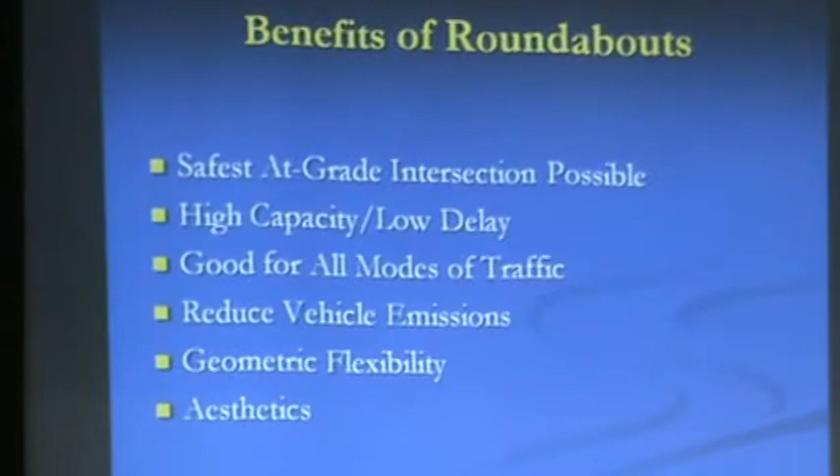We can work with geometry, with intersections that are very skewed, and the best thing that communities have found is that it helps to enhance the aesthetics of the area.

Roundabouts are not traffic circles, roundabouts are not rotaries. Rotaries are something we have seen, and we have one very close in town. It's a bigger circle, speeds are really high. When you get into the circle, you basically don't have any clear direction of where you are supposed to be, and there may be some confusion about whether you can change lanes inside the circle. Most of the time, there is not a clear indication for that.

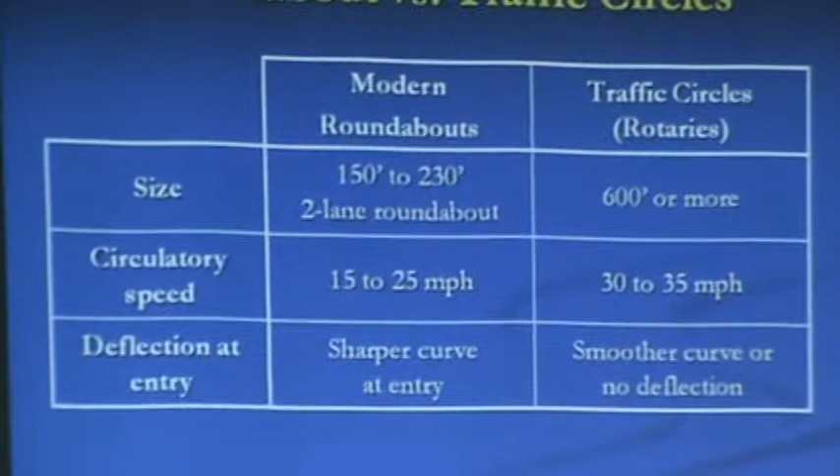If you remember the Sagamore Rotary in Massachusetts trying to get into the Cape, it was a nightmare, and it was huge. The only solution the Massachusetts Department of Transportation could provide was a flyover. The reason for that is because they had a lot more traffic than what a roundabout could manage. It's not because roundabouts wouldn't work per se, but the amount of traffic in that specific location was way beyond what a roundabout can manage.

A roundabout is usually between 150 to 230 feet in diameter when we're talking about two-lane. Some rotaries in existence are up to 600 feet in diameter - that's almost like a small NASCAR ring. Because the circle is a little smaller, vehicles are actually forced to drive very slowly, 15 to 25 miles an hour.

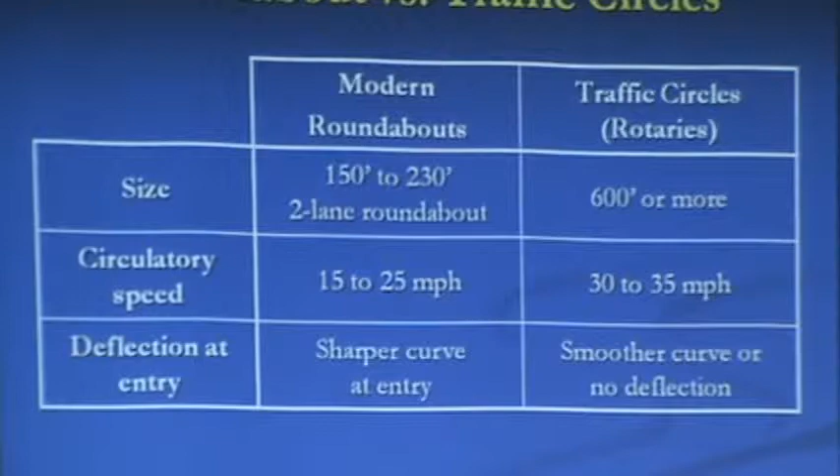When you have a big rotary, like those big circles in Massachusetts, you can reach very easily 40 miles an hour. If you are totally stopped at the entrance trying to merge into traffic in the circle, it's harder to merge with traffic going at 40 miles an hour than when traffic is going at 15 miles an hour. That's the beauty of it - you are actually capable of moving more traffic because everybody is moving slower.

There is a deflection in the entry. Rotaries just put you right there in the middle, and there is nothing in advance of the circle that forces you to slow down. Modern roundabouts actually have small curves just before you get to the circle, so you're slowing down before you get there. We'll see a few examples of that.

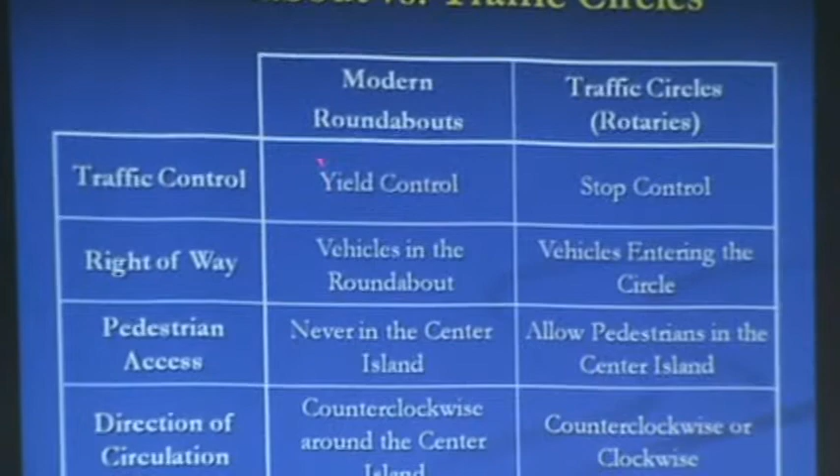The way they are controlled is yield control. There are some locations in other parts of the country where they have stop control. The right-of-way is for the vehicles already in the circle, similar to the rotaries we have in New England - whether we have a lot of drivers that do it or not, that's a different story.

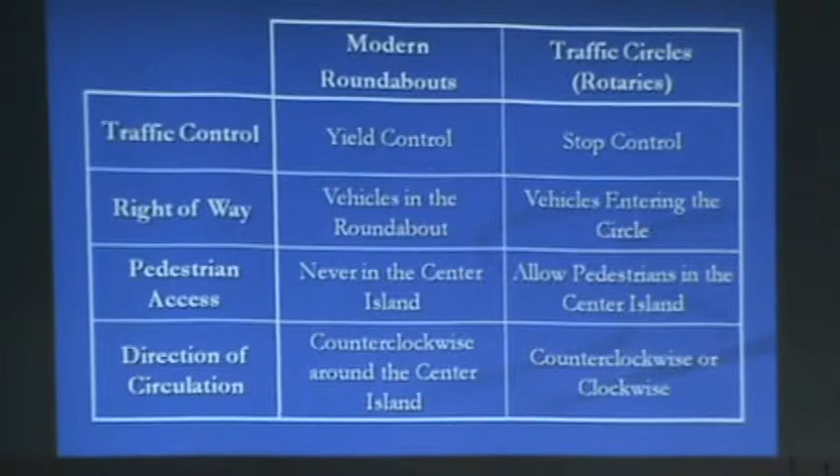Pedestrians are never allowed, or they are not encouraged to be in the island. If someone wants to water the plants in the center of the island, if they want to do it at their own risk, sure, go ahead, but there is nothing that we're going to design to have pedestrians gathered in the center. This is unlike Washington State, where they have neighborhood circles where someone can turn left before the circle.

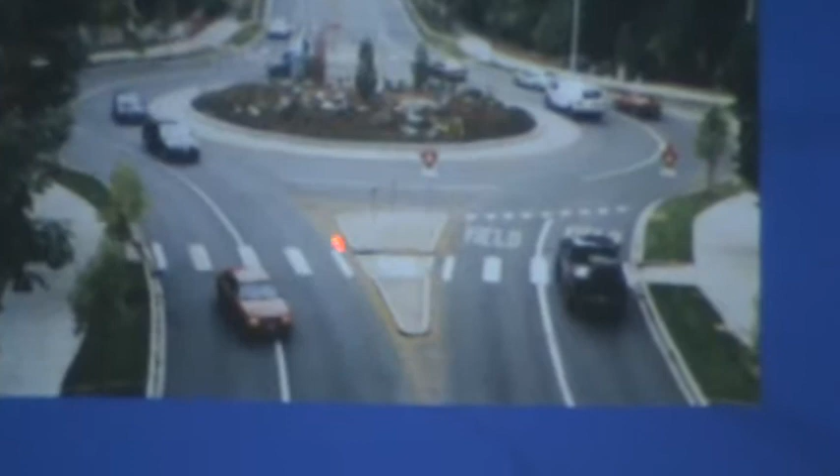In this case, we have a modern roundabout in Maryland. They have a beautiful landscape.

One of the beautiful things about roundabouts is that when you have to cross this road further down, you actually have to deal with 4 lanes of traffic. So you have to look to the left, make sure you have enough gap for those cars coming that direction, and at the same time look in the other direction and make sure you have a good gap in the other approach. The chances that you're going to have a good gap to run or walk across the road when dealing with 4 lanes of traffic is minimal.

You basically have to run, you have to be in very good shape. In the case of the roundabout, you're only dealing with 2 lanes of traffic, coming only from one direction. You don't have to deal with someone making a right turn or left turn who isn't looking at you, and the speeds of drivers already approaching the circle are a lot lower. You don't have 35 or 40 mile an hour traffic going in a straight shot while texting, on Facebook, or picking up a CD. When approaching a circle, there's so much lack of control, like a signal, that you don't have a green, a red, or a light per se. You have to pay attention to the road.

As a driver, you are forced to pay attention to the road. So if you have a pedestrian standing here trying to cross, you're probably going 25 miles an hour, and at that speed you're more likely to yield to the pedestrian trying to cross. As a pedestrian, you're only dealing with 2 lanes of traffic in the same direction. You cross, stay in the median, and wait for the other direction. There's always traffic coming at you from one direction, unlike any other intersection where you have to worry about right turns, left turns, and everyone going through.

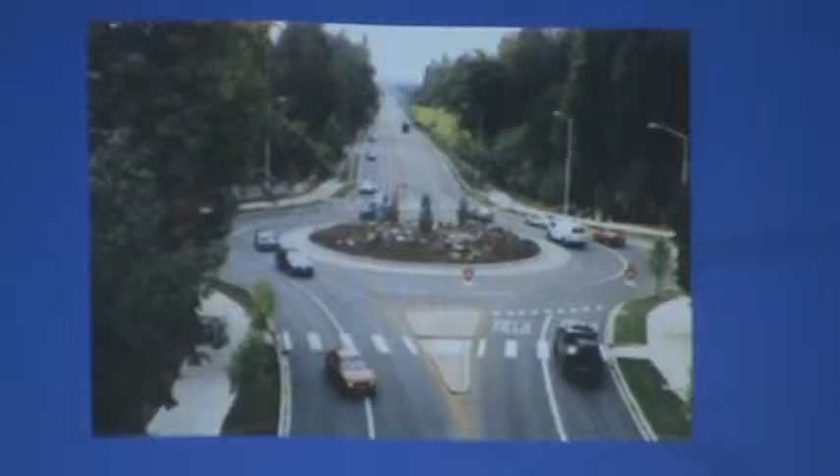Roundabouts are definitely not rotaries. This is a rotary that New York State Department of Transportation converted. You can see they were able to build the modern roundabout inside, with slip lanes for right turns, inside what the central island used to be. This is 660 feet in diameter, 2 to 3 times bigger than what we have in Newport Rotary, so you can get an idea of how big this is.

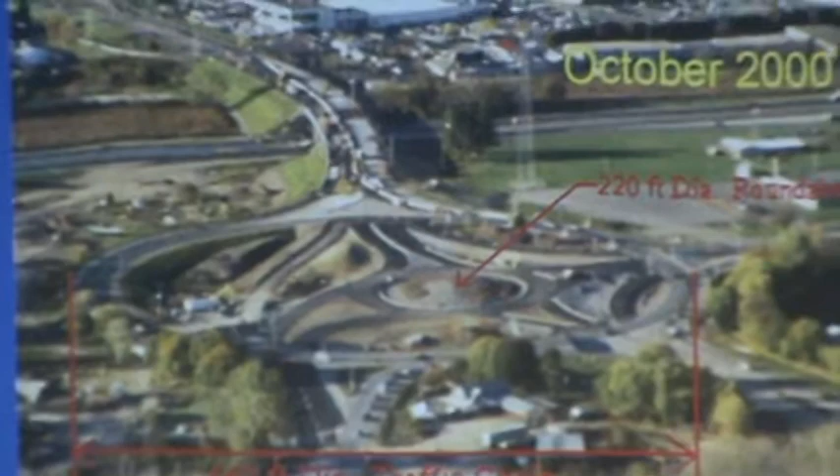At this rate, you could easily do 45 miles an hour. So they have a lot of congestion in this area. You can see all the queues, because of the construction, not just because of the operations of the rotary. They're replacing it with a smaller circle, and a lot of people were saying to the New York State Department of Transportation, 'You are crazy. How come you're going to manage more traffic with less pavement? You guys are making a terrible, terrible mistake. You are not going to do it.'

One of the things we have learned in the industry is that whenever a roundabout project is proposed, there is strong resistance from the communities. Something we try to do is outreach, to make sure everyone understands how a roundabout works. The opposition to installing a roundabout is really, really high, but once the roundabouts are installed, the opposition practically disappears. In some cases, towns have said, now that you're proposing a new signal for my town after you put in a roundabout, I don't want this signal.

I want that roundabout that you built there before. In this particular intersection, once they built it a lot smaller, it appeared there was a lot less traffic. All the people opposed to the roundabout were saying, you built this weird thing, it's not working, people are avoiding it, that's why we don't have traffic. They said everybody driving here doesn't understand how to drive, so they went away. At first glance, that's probably the best explanation for the lack of queues, the lack of traffic.

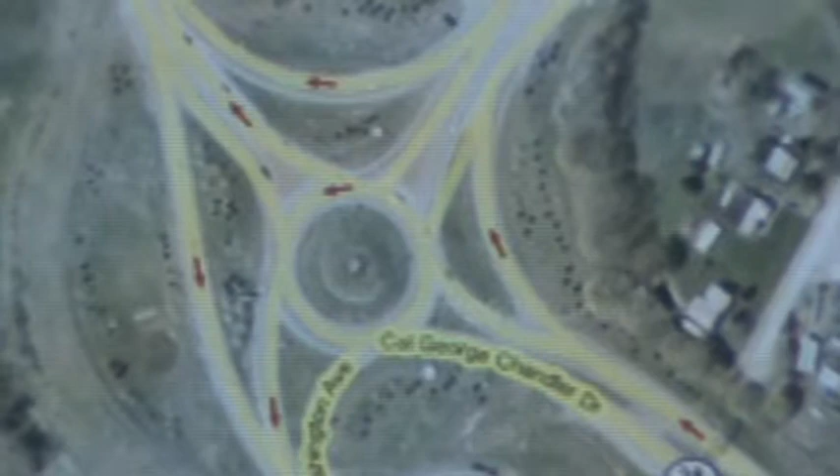When the New York State Department of Transportation did a study afterward, the volumes were comparable—not lower, not higher, very similar. It's just that a smaller circle can handle the traffic better.

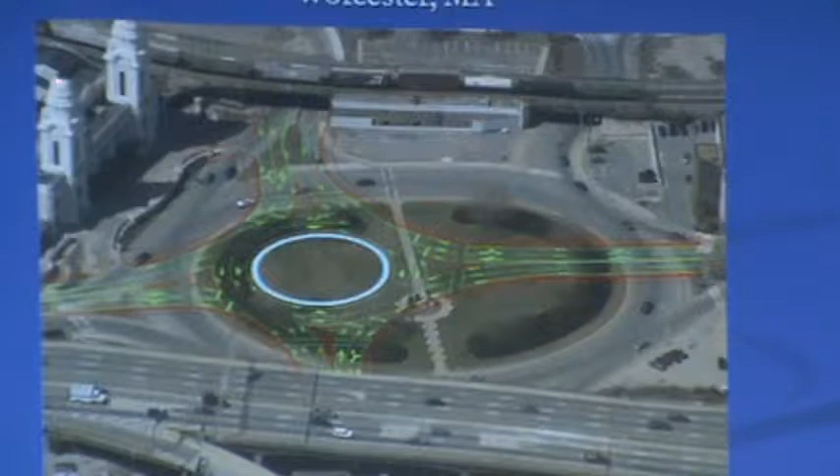This is another project, Massachusetts Department of Transportation working with the City of Worcester. They replaced this huge rotary with a modern roundabout, and it's available for anyone to see now if you take a ride to Worcester, right where the MBTA ends, Union Station. You can see it in operation, and they actually installed some flashy, fancy lights on the pavement—when anyone crossing pushes the button, lights tell drivers someone is on the road trying to cross.

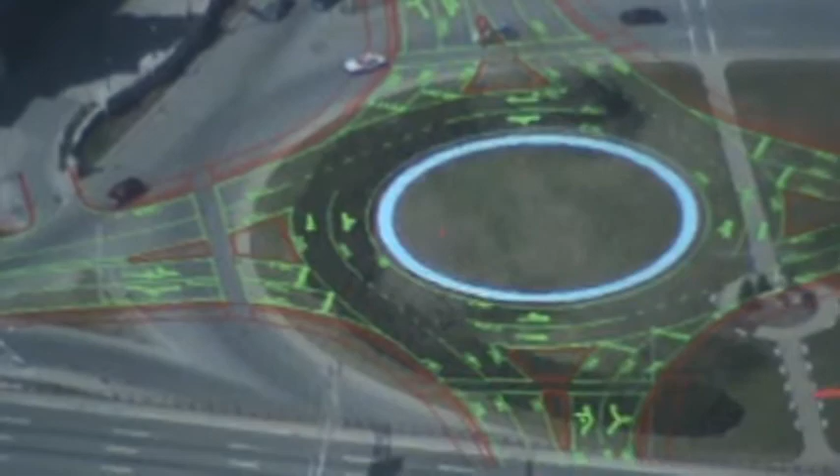That's something some municipalities and agencies are really willing to do—have some device to warn drivers there is a pedestrian crossing. Again, you can see the size of the circle is much smaller, allowing them to build a new intersection within the island that used to be there.

A roundabout is safer compared to a traditional intersection, and this is a single lane. At any traditional intersection—this could be your neighborhood street—you have up to 32 points of conflict. And if you add one more lane, you're going to add more points of conflict.

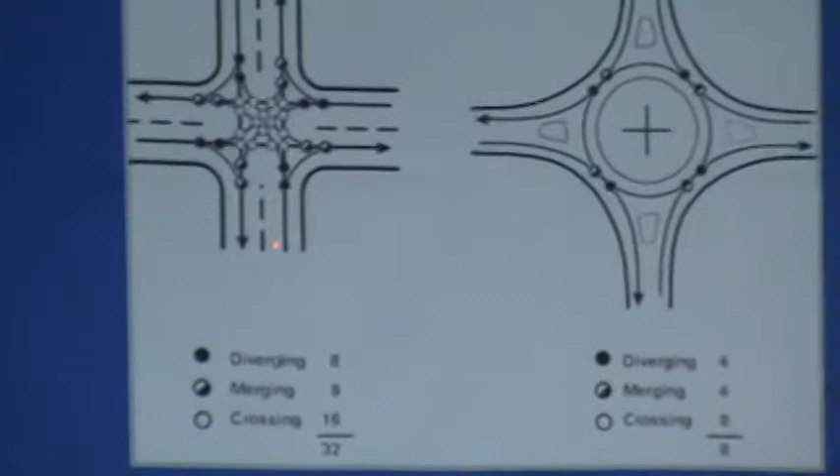At a traditional intersection, there's a risk of someone going in this direction, not stopping or distracted, hitting someone at a right angle. Or someone crossing in this direction while this person tries to take a left—there's a possibility of an angle collision. Most likely, when you read crash narratives, it's because the driver was trying to look for a gap in traffic, and sometimes they misjudge the gap and get a head-on collision. Or if they're lucky enough to make the movement, they also have to worry about pedestrians crossing.

In the case of a roundabout, you eliminate the possibility of an angle collision. There may be a higher possibility of a rear-end crash, because if I'm yielding to whoever is already in the circle, the person behind me may think I'm not going to yield, and I get rear-ended. But in any case, a rear-end crash is a lot less severe than an angle or head-on collision, and the speeds at which these events occur are very different.

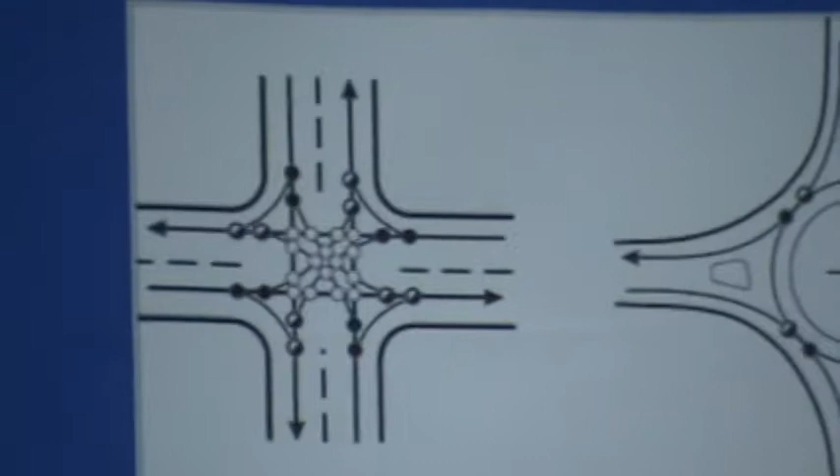In a roundabout you may be talking about a 15 to 25 mile an hour crash, compared to a head-on collision at 40 miles an hour when someone is stepping on the gas—which isn't always the case, but there's no chance, or a very small possibility, of a 45 mile an hour collision in a roundabout.

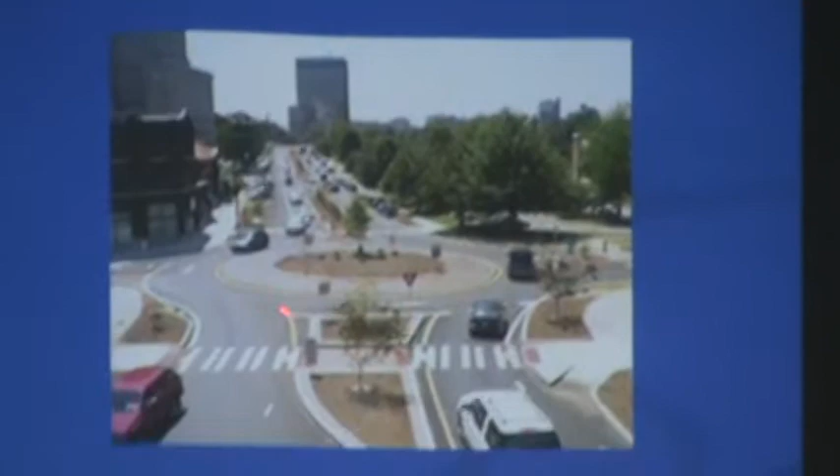Roundabouts are good for many environments. In an urban area, you might have 4 lanes in one direction, 3 in another—7 lanes of pavement—at a signalized intersection. They replaced it with a roundabout in the middle of an urban area with a lot of pedestrians, and because roundabouts are more efficient, they were able to manage the same amount of traffic with a single lane approach.

Instead of having all that pavement, they were able to put in trees and bushes, something more pleasing to the eye. It also helps with absorbing water—instead of all that runoff, you have some area to catch it.

A 2001 study by the Insurance Institute for Highway Safety looked at the people who pay the bill whenever you get a crash.

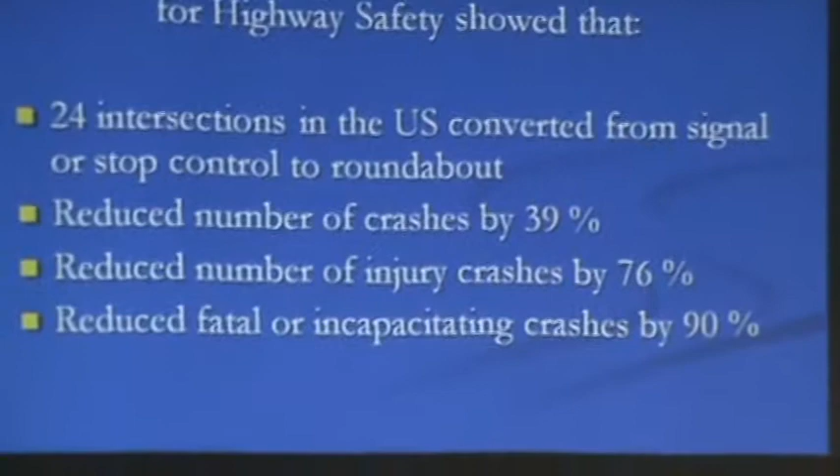Roundabouts are actually something that were pushed into the industry's throat, if we can say it like that. Federal Highway was not very receptive to that. Most of these intersections, many of the first roundabouts that were built in the U.S., were actually driven by the community. No Department of Transportation, no State Department of Transportation was really in favor of them at the beginning.

When we come with a show of roundabouts to communities, there is always someone approaching us saying, why didn't you just build a roundabout if there's an intersection you finished reconstructing about 2 years ago? Because we were not ready. There are many intersections that we're now kicking ourselves over, saying, why didn't we build a roundabout?

This would be a lot better operations, but we were not ready. This is something we had to learn, something we had to feel comfortable with. We wouldn't be here presenting you an option to have a roundabout in a location if we weren't comfortable with them. We're not experimenting with Middletown. We're definitely sure roundabouts can work. We're like a surfer, riding the tide that other states and communities already experienced. We're learning from their mistakes. If they had problems with signage and that kind of stuff, we're benefiting from their experience.

Roundabouts actually reduce the total number of crashes, single-lane roundabouts up to 40% total crashes. Injury crashes, anything that sends you to a hospital or doctor, 80%. Any fatal or incapacitating crash, something with a long-term impact on your health, up to 90%.

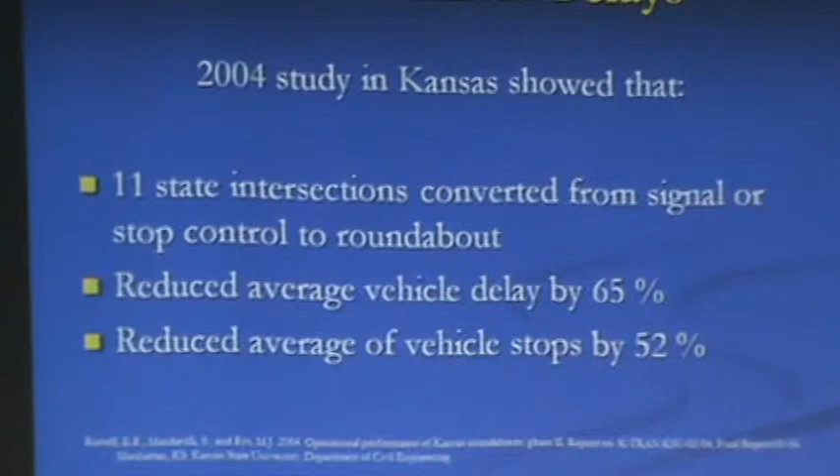More statistics: vehicle delays. A lot less people have to stop. Yes, if you go through and get a green at a signal, you basically have no delay. In a roundabout, you're always going to have some delay. You have to slow down, turn right, go around the circle, and take your exit. Everybody has a certain delay. But on average, if you add everybody, say 10,000 drivers using that circle, the average delay in that intersection compared to a signal or stop-control intersection is going to be a lot less.

When you have a green light you have no delay, but if you're stuck on a side street waiting 15, 20, 35, 45 seconds for a green light, those 45 seconds averaged with everyone else is how we estimate the delay.

We don't have as much pollution emitted to the environment, it's a lot less. Roughly, we cut it by a third. We can save a lot of fuel if we install more roundabouts.

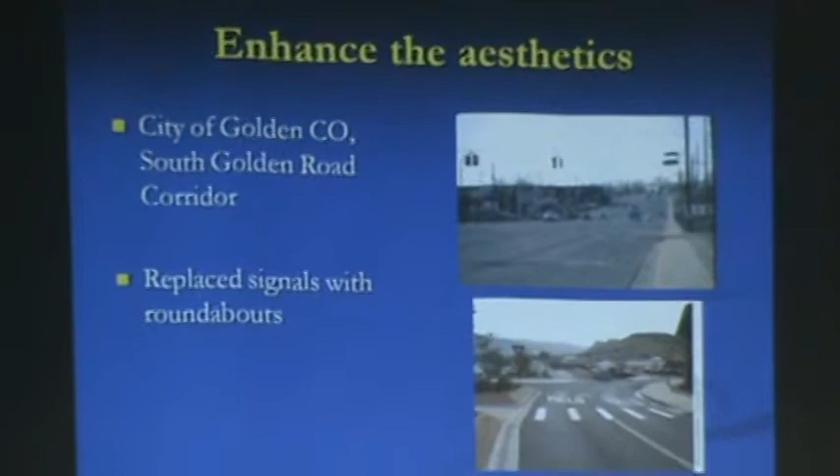The enhanced aesthetics also help the economy, if you want to say that. There's a study published by the city of Golden, Colorado. Go Google 'City of Golden, Colorado, roundabouts,' and I have a copy of this study if anybody wants to see it. They installed several roundabouts in this commercial corridor with a median.

So they told Burger King, IHOP, Walmart, sorry, you're not going to have a driveway where people can turn left in or left out. I'm sure they were very happy — I'm being sarcastic. They were very upset. There was no way, because a guy driving who wants to get a burger and a soda has to go around the circle and come back. He's never going to do it. They were very, very upset.

After several years of this project being active, the economic growth in this area, the businesses in this corridor, is a lot higher than the rest of the city of Golden, Colorado. People are actually willing to drive there because it's more pleasant and safer to drive. You can go from point A to point B a lot faster without necessarily going faster per se. You don't have to drive 40 miles an hour — you actually drive a lot slower, but you don't have to wait at every single intersection.

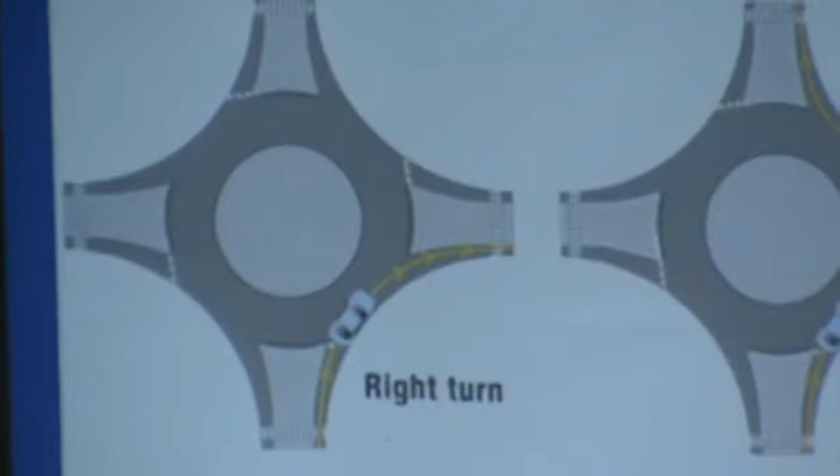I saw a beautiful article in the local paper about the difference in how to choose your lanes when you're driving a roundabout compared to a rotary. This isn't so new. Similar to what I was saying at the beginning, if you want to turn left in a roundabout, you locate yourself in the left lane, or if you want to turn right, you turn yourself into the right lane.

If this is new, we have to go back to driving school, because last time I checked, at any intersection, if you want to turn right you have to be in the right lane, and if you want to turn left you have to be in the left lane. If you want to go through, check the pavement markings and signage, because it's not the same for every roundabout, but you'll be able to go through the circle without changing lanes and reach your destination.

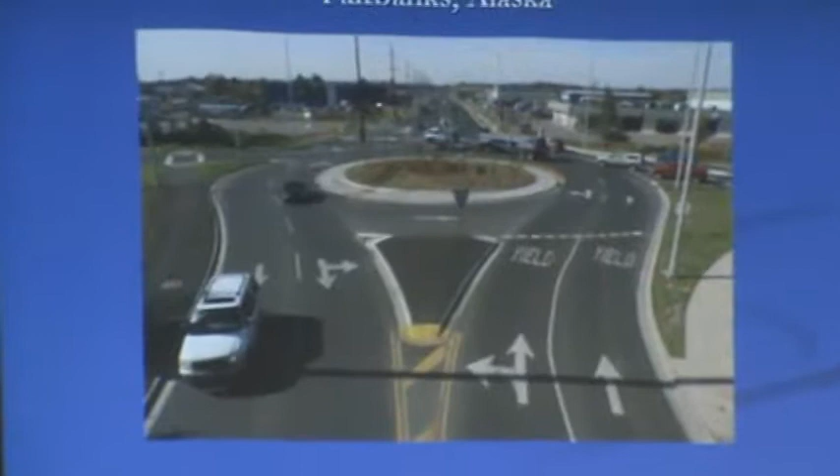Roundabouts are all over the place. They are not just for Rhode Island, not just for Middletown, not just for East Providence. We have heard all that before. Well, the industry has installed roundabouts in places with a little bit of snow like Alaska, with tourists like Colorado and Florida, and with a lot of pedestrians. In all these cases, the roundabouts have been successful.

Outside of an interstate, on a freeway, you most likely have WB-67 big trucks that deliver to the local stores.

This is another intersection closer to home, New Hampshire Main Street at Daniel Webster Highway. The first time I drove through this intersection, probably 13 years ago, I was very confused, but I never got into an accident. I didn't know that this area wasn't supposed to be driven on by my car, and I felt it. The next time I drove through, I didn't go on top of that area.

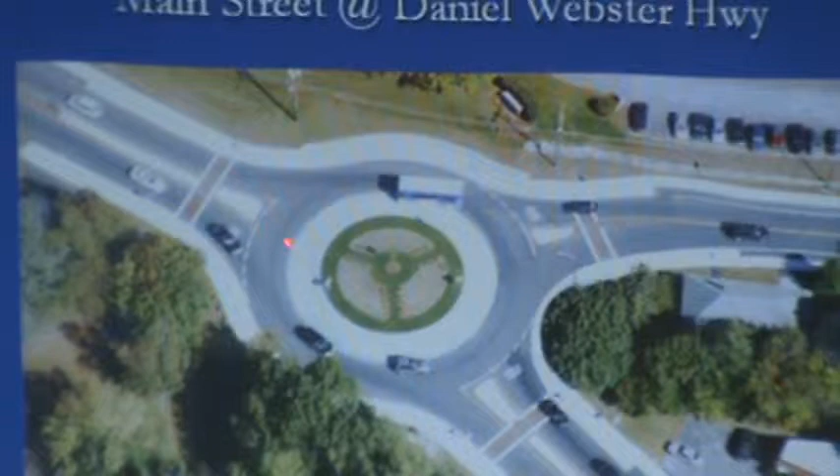My car didn't get damaged, but it's uncomfortable enough that you know you're not supposed to be driving there. It's designed so that any tractor trailer, big bus, or big truck can actually use it as extra pavement, but it's not meant to be driven on by passenger vehicles.

In Worcester, Massachusetts, at Washington Square, the one I was describing before, they actually have lights embedded in the pavement that start flashing when someone pushes the button. I'm not sure how effective they are. Talking to the traffic engineer for the district in Massachusetts, he said pedestrians just walk by and don't care about pushing the button, and they haven't had many or any issues that he's aware of in terms of handling the amount of traffic or handling pedestrians.

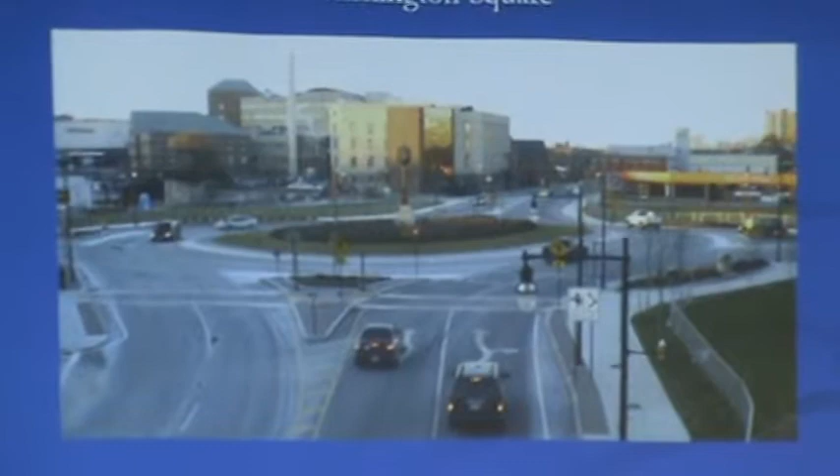The train runs through this part, and there's also another train track up here. On the other side of these train tracks, there's a signal very close by that gets used more than Ninth Street normally would be. As far as I'm aware, there aren't really concerns about traffic backing up from the signal toward the roundabout and creating a huge queue.

If you continue in this direction, you find the on-ramp to 290 that runs through the city of Worcester. So this is a roundabout in a very urban area with a lot of pedestrians who use the train, and with lots of different modes of transportation.

Roundabouts in Rhode Island—we already have four roundabouts in place. Two of them are one-lane, two of them are two-lane. The first one was installed in the late 90s in Centerdale, North Providence, again a project that wasn't driven by the Department of Transportation but something the community wanted to see. I'm not so sure how they convinced the department at the time to install something this experimental, but they went forward and installed it.

Twin River Road, right outside the gaming facility in Lincoln—we made the mistake as a department of never telling the public that there was going to be a roundabout, and oh boy, we heard about it.

We were the worst people you could even imagine in Lincoln. At that time, dealing with the police department during implementation, people were very confused about how to ride it, and they told us this was going to be a nightmare. As soon as we leave, the police said, there's going to be a head-on collision and we're going to have to come back to pick up the bodies. Well, we actually asked them to leave, and guess what? People were driving much better, because they had no distraction with the lights on, and all the cones and barrels were gone. So drivers were actually able to focus on all the elements of the road, pavement markings and signs, and were able to manage and handle that roundabout.

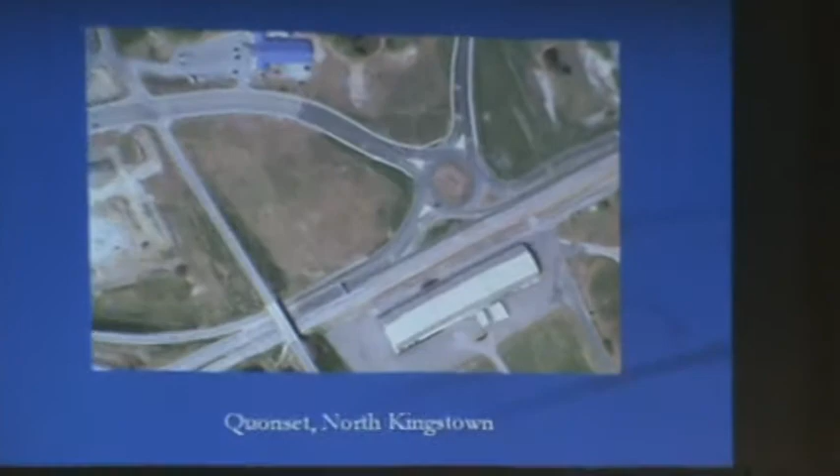This slide, I actually downloaded this image about a few months after the new roundabout was installed. Google was not catching up with us, and preparing for this presentation a couple of months ago, I found that they finally flew by and obtained some images, so I can show you now what a two-lane roundabout looks like. Unfortunately, we have the infrastructure, but we don't have the traffic yet. We expect that this roundabout will be heavily used.

One of the questions we heard, because this is not the first time we present this project, is what's going to happen when we have an emergency vehicle and if I am in the circle, what should I do? Well, I think we should do the same thing we do in any other intersection: just move away from the intersection and let the roundabout clear, so the ambulance, fire truck, or police car can actually go through the intersection.

This tractor trailer was actually stopped there for 5 minutes. I'm not so sure what happened to him - a flat tire or something, or maybe just taking pictures, visiting tourists. I'm not exactly sure. But this guy was stopped there for 5 minutes, and despite the fact that he was blocking 1.5 lanes, traffic was able to move around. If we had a tractor trailer stop right now on West Main Road, I'll tell you, it's not going to take more than 1 minute until we start seeing backups all the way to the main road.

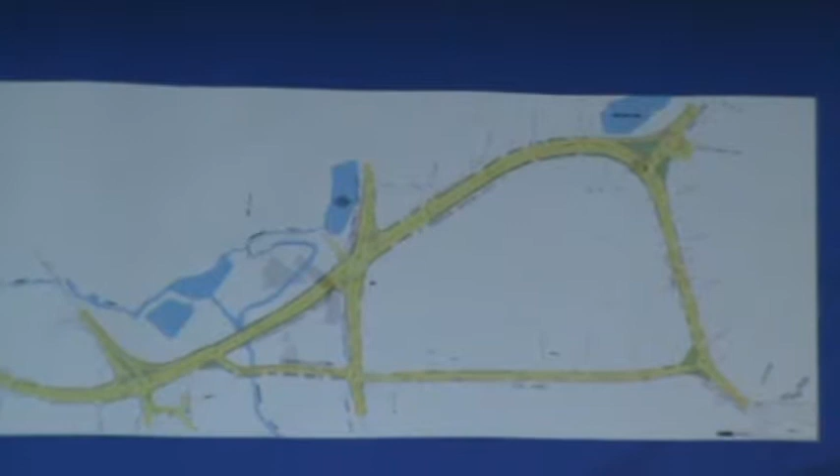This project actually proposed to make this section a two-way, and we're going to install, as I was saying, 5 signals. It was going to be a fantastic business opportunity for whoever wants to sell sodas on a very hot summer day, because you would have basically a parking lot in front of you, and everybody would be willing to have a cold soda.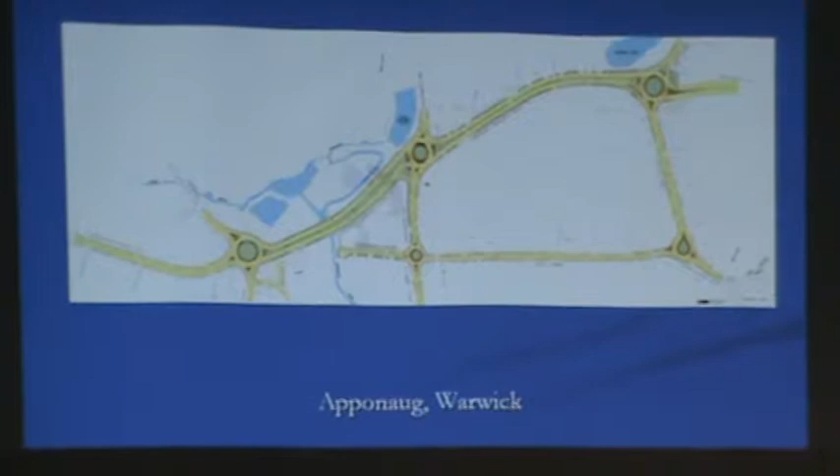We actually asked our consultant at some point, probably 3 or 4 years ago, what if we look into roundabouts? What if, instead of installing these signals that we know from day one are going to fail because there is so much traffic that it's not going to be able to handle - even the signals are not going to be able to handle the amount of pedestrian traffic we have.

Why don't we look into roundabouts? So we look into roundabouts and we are moving forward with the installation of multi-lane roundabouts, medians, and a couple of single-lane roundabouts in these two ends. Most of the traffic going from 95 further in this direction towards Oakland Beach on the eastern side of Warwick will have to drive to this corridor.

We had a public meeting, and at that time everybody was saying no more circles. We already took them out, why do you guys want to put them again? We presented the presentation, we explained what roundabouts can do for the people. I can tell you we did not convince 100% of the people, but whoever was totally against the roundabouts was at least willing to give them a chance.

And at this point, with support of the mayor of Warwick, we keep moving forward with the design of this 5 roundabout corridor.

So whether we like it or not, at some point, whenever you go to Warwick, in probably 10 years, you will have to deal with roundabouts. So we either learn now, or we will learn sometime later, because roundabouts are going to happen in Rhode Island no matter the funds, or no matter what every specific town would like to see, because there are other municipalities in Rhode Island that are willing to install roundabouts in their roadways.

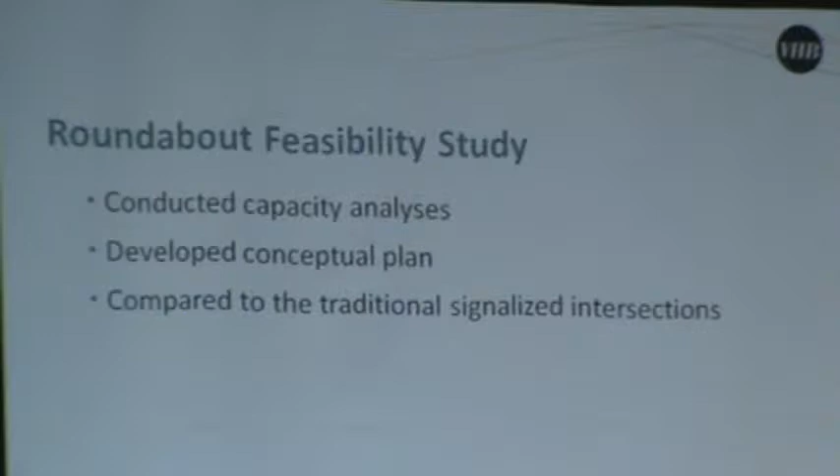These are the two options shown earlier. The signalized concept, similar to today, will have two traffic signals. The major difference is the left turn lane, which doesn't exist today between the intersections, whereas if a vehicle is waiting to take a left turn, it a lot of times today will block one of the through lanes, so you're down to one through lane at the intersection. The addition of a left turn lane will improve that situation.

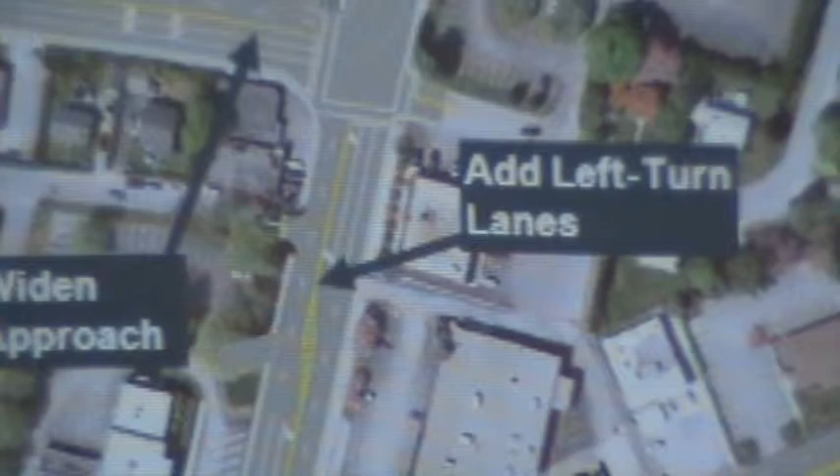On the right is the roundabout concept. We did a capacity analysis of these. The first two columns show the overall delay and the level of service of the existing traffic signals out there.

They operate at a certain level at the Coddington Highway. During the morning and evening peak it operates at level of service D, about 40 seconds of delay, average delay - that's the average delay to every vehicle going through the intersection. The East Main Road intersection currently operates at level of service C, with average delays from 23 to 33 seconds per vehicle.

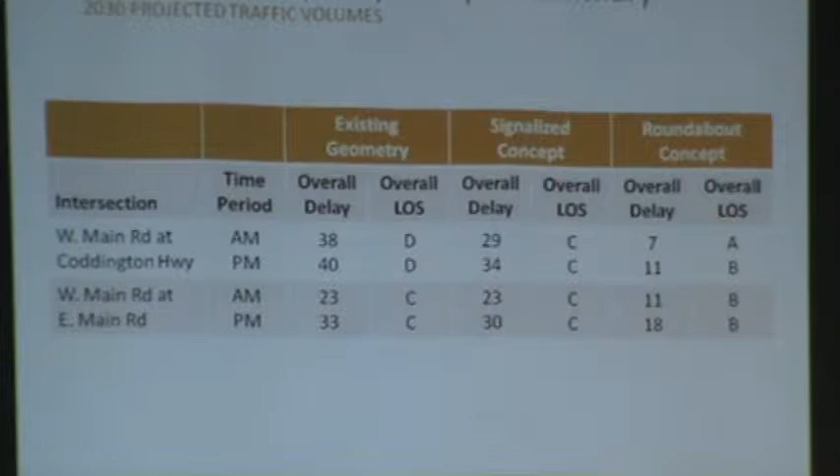As you can see, the signalized and the roundabout concept will improve the operation of the intersection and provide additional capacity. We end up with level of service C for the signalized option, level of service B with the exception of level of service A during the AM peak at Coddington Highway.

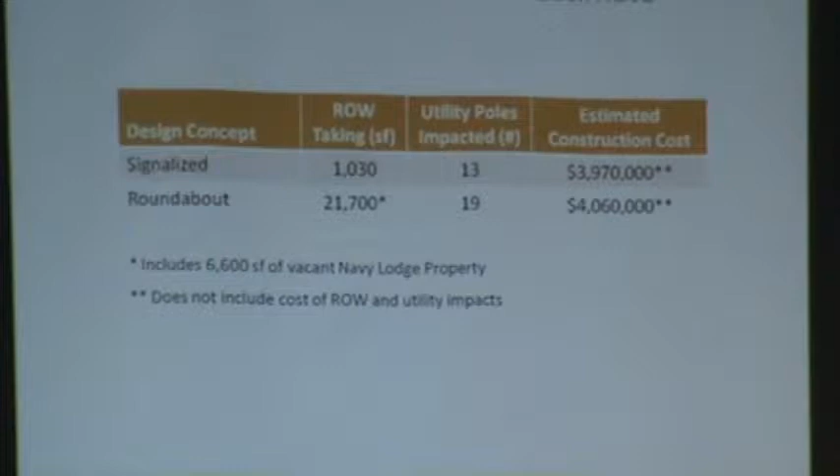The construction impacts and cost estimate.

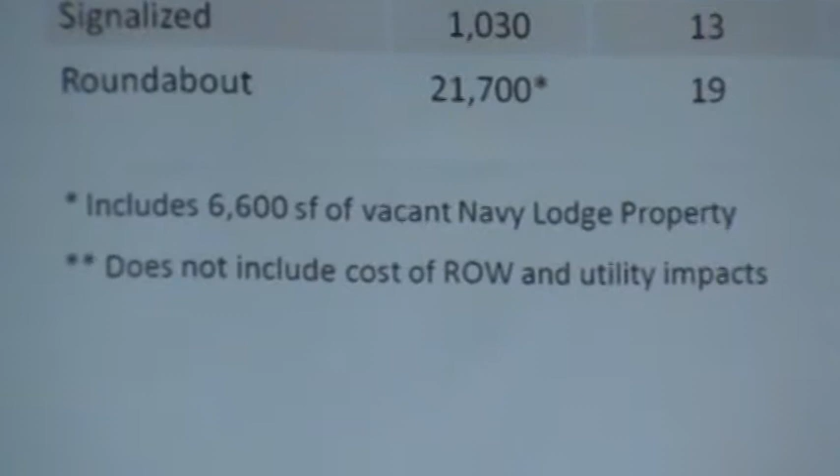The costs of these are comparable. The signalized option has a much less right-of-way impact, 1,000 square feet of right-of-way versus 21,000. This 21,000 also includes 6,000 square feet of the Navy Lodge property. It's important to note that these two cost estimates don't include right-of-way impacts, which are difficult to project. So the roundabout, with a lot more right-of-way impacts, will increase the cost estimate.

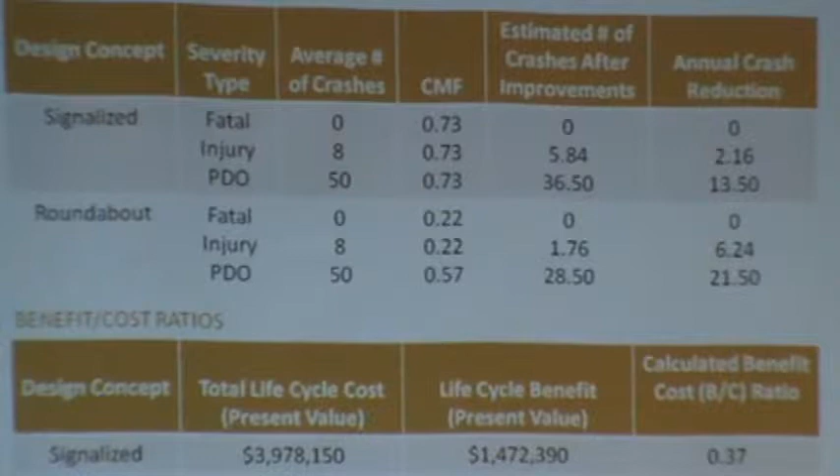We then go through a safety benefit and a benefit to cost ratio. As Francisco discussed earlier, there are crash factors and improvements that the roundabout will have, reducing the severity of accidents. This has been shown in other places where roundabouts have been implemented, and those crash factors feed into the benefits of both the signalized and roundabout options. Adding the left turn lanes at the signalized intersection will also have some benefits.

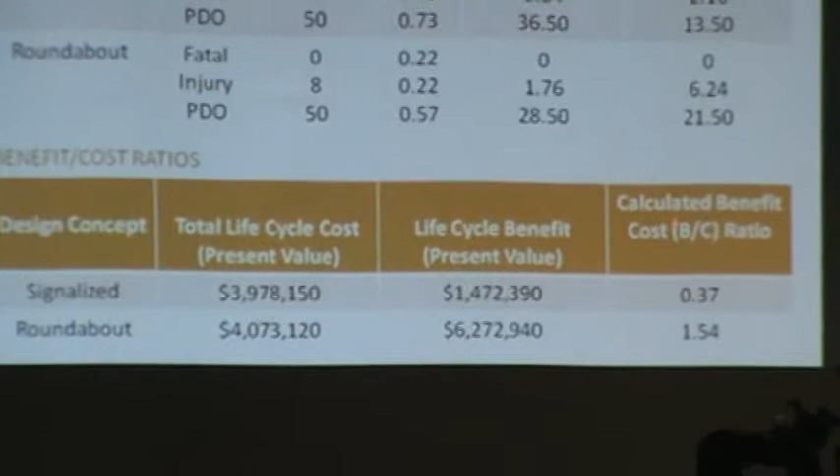So what we come up with, at the bottom here, is the signalized and roundabout options' benefit to cost ratio. Obviously, if your benefits exceed your costs, you end up with a number greater than 1, and you always try to shoot for a benefit to cost ratio greater than 1. The roundabout option gives you that, whereas the signalized option is still an improvement, but not as big of one.

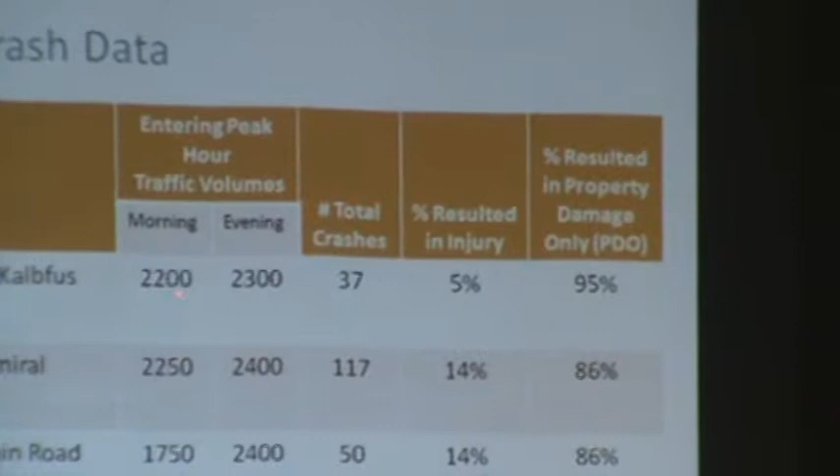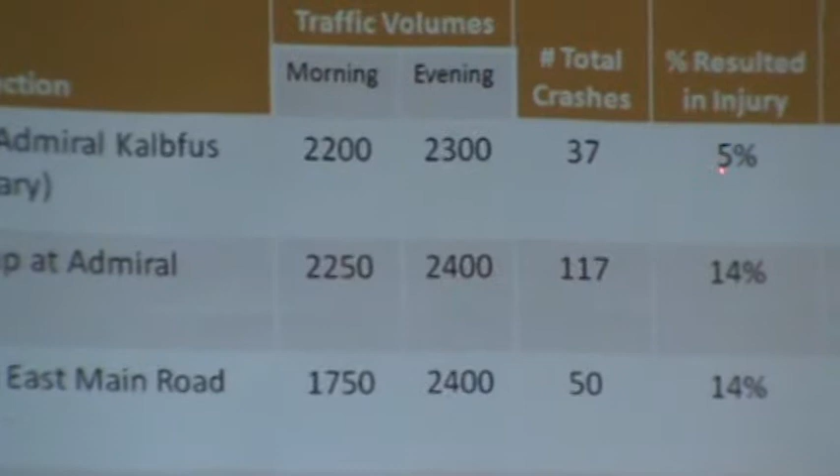This is an important slide to compare other intersections everybody's familiar with. The first is the Newport Rotary, with volumes a little over 2,000 vehicles per hour. The number of crashes under existing conditions is 37, with 95% being property damage only and 5% resulting in injuries. Compared to the Pell Bridge off-ramp at Admiral Kalbfus, with comparable volumes, you see 14% injury crashes. That's primarily due to all the conflict points Francisco was talking about earlier. West Main Road, East Main Road, Coddington are similar, around this 14% injury rate.

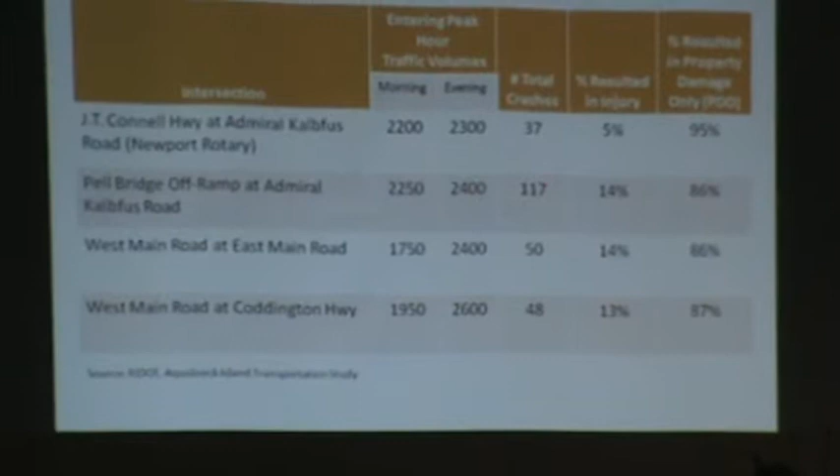So even if you look at total volumes, even though the rotary isn't a roundabout, and roundabouts are typically even safer than rotaries, you have a total crash count less than the existing two intersections.

We have some simulation models that we put together. I think we're going to show those just after. Maybe I'll show you the clips from the videos just to show you what you're going to be looking at.

This is West Main Road, Coddington is here, East Main Road is here. This is the signalized option, this is the roundabout option. In both of our simulations, what we first look at is existing conditions, and we try to calibrate that to accurately represent actual conditions on the roadway. Then we go and implement both of the two proposed alternatives.

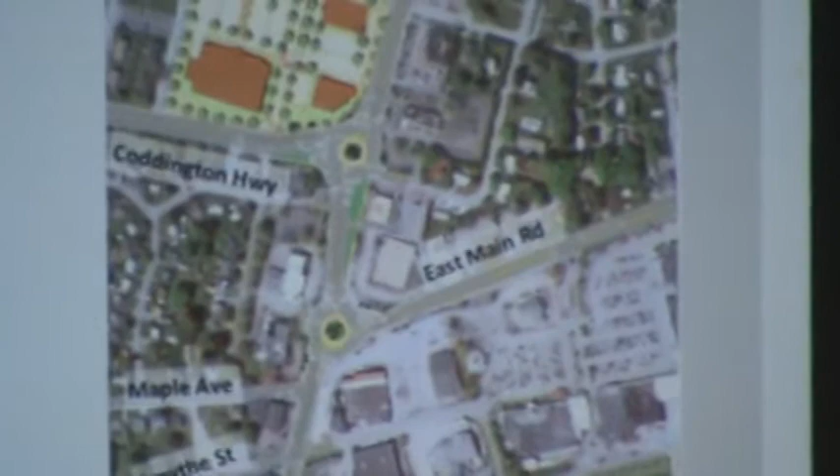What we include in these future simulation models and our analysis is the 2030 traffic volumes. They include expected growth in the area, and also the growth setting here that's under design and planning stages at this point. So we included all of that additional traffic that's going to be generated in the future, just to make sure we don't put either of these improvements in and have them become obsolete before we get them constructed.

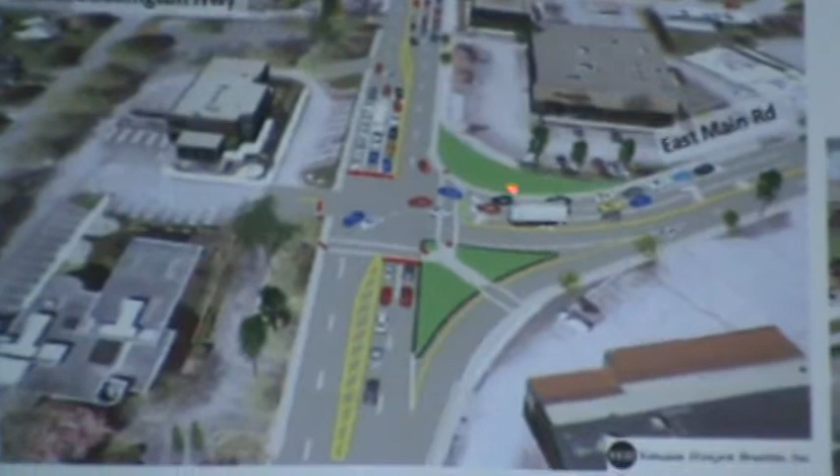These are some snapshots from the video you'll be seeing. This is the signalized option with modifications to these right turn movements. As you know from East Main, there's a channelized right turn movement which people sometimes don't yield or stop at the end of, if traffic is heading north on West Main. So this is going to bring them into the intersection and require those vehicles to stop.

Again, heading northbound from West Main Road onto East Main Road, this is such a generous and large radius that people fly around this corner. There are geometric modifications proposed that will reduce this radius and slow vehicles down from making such rapid movements.

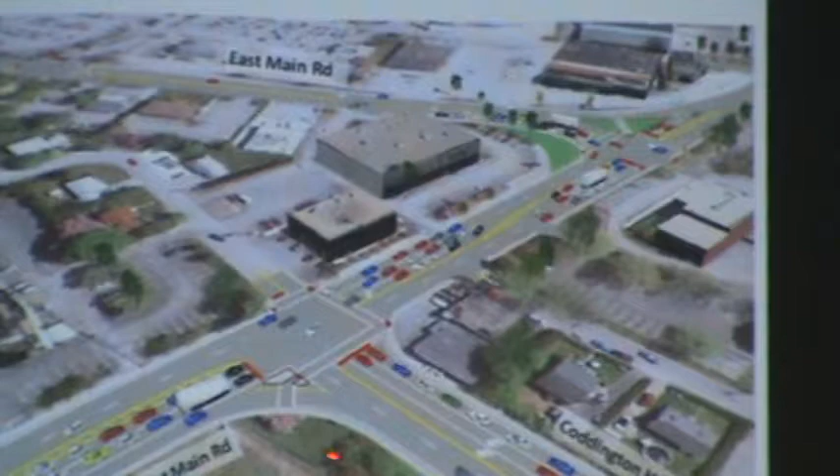This is kind of flipped around. Coddington comes in from the west side heading eastbound - this is the Coddington approach. What you'll see in the simulations is an aerial flyover of both study areas - this is Coddington, and this is West Main.

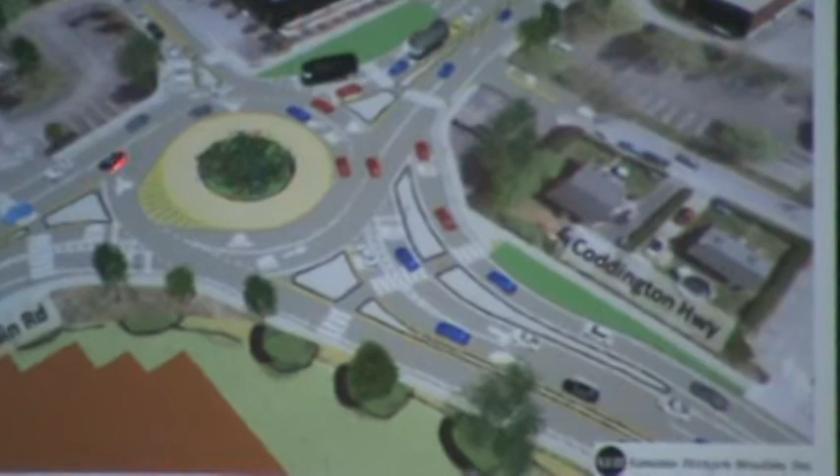Again, the same viewpoints - these are the two roundabouts, and this is Coddington with the roundabouts. If you look at the lane configurations, the Coddington approach proposes a left turn lane, a left-through lane, and a right turn bypass lane, which is like an exclusive right turn lane, so those people won't even be entering the roundabout. All the other approaches are two-lane approaches.

Let's go through and show the simulation.

We also keep in mind we didn't perform traffic counts of all the driveways along the corridor, but we did put in some volumes on each side street which correlate to the total volumes in the corridor.

It does represent that. What you see happening today, a lot of people are often complaining about the signals, getting stopped at multiple signals as they progress down the corridor. It's difficult, and the DOT's gone through several times trying to fine tune and get the platoons through as many signals as they can. But what happens is you have a lot of side friction. You have people coming in and out of driveways, people stopping in the left lane to take a left turn, which people have to swerve and go around. So that's a difficult thing for them to do.

We're going to just summarize the differences between the roundabouts, and then we're going to switch computers real quick, and then we'll show you the simulation. Let's go back here.

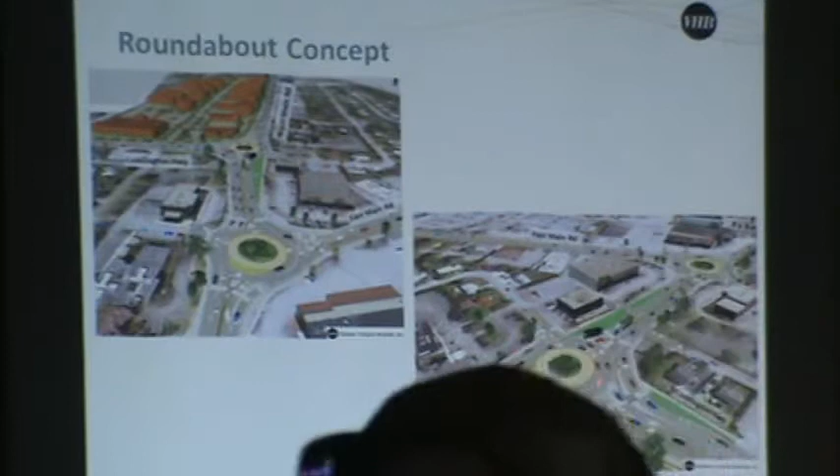Again, as Francisco was talking about, if you're coming down Coddington and the roundabout concept were to be implemented, and you wanted to take a left turn, today there's no left turn movement, so you can make a left turn from the roundabout in either of these two lanes, and this will direct you around and through the intersection.

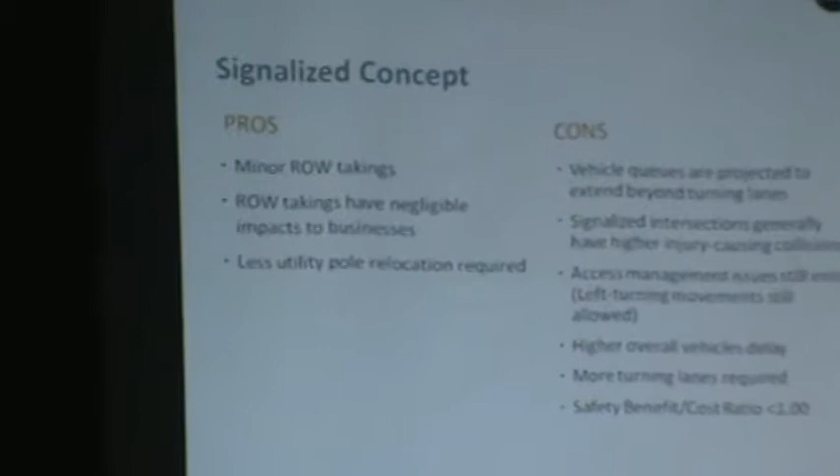The signalized concept, we prepared the pros and cons of each of these two alternatives. Again, the DOT and we also agree that either of these two alternatives is going to be an improvement on what's there today.

The pros for the signalized are that there's less right-of-way taking. The right-of-way takings are negligible compared to the operation of the businesses. There's less utility pole relocations. The cons: vehicle queues projected to extend beyond the turn bays.

Ideally, back in this drawing, we have a back-to-back left turn lane here. Ideally, we have a five-lane section in here with a left turn lane in Coddington filling up half of that area, and then left turn into Coddington filling up half the area, and the left turn onto East Main filling up half of that area. The projected queues are going to extend past those storage lanes and will occasionally block one of the through lanes. So ideally, it would be nice to have a 6-lane section here where you had the left turn lane full length to accommodate those cars, and a left turn bay in the other direction.

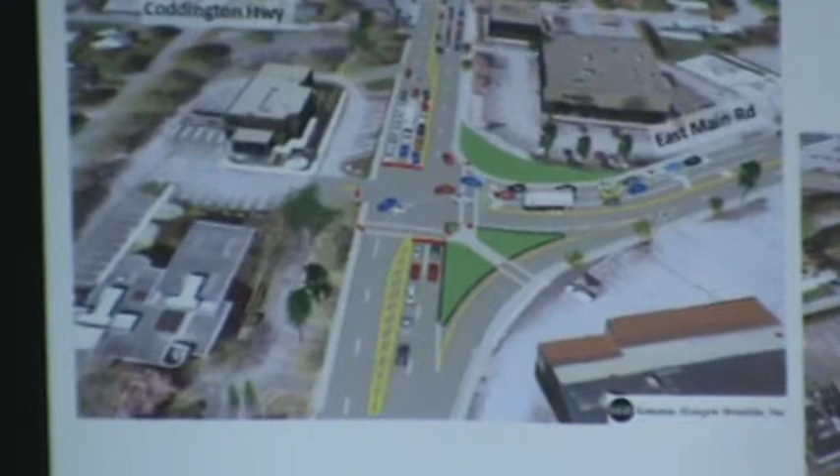But, to minimize our right-of-way constraints on this one and not impact businesses, that's the concept that was developed.

Access management issues still exist. You still have the difficulty making left turns out of businesses. The higher overall vehicle delays, as shown in the capacity analysis. More turning lanes required. Like I said, the 6-lane section would absolutely be desirable if we had a blank slate and we had enough right-of-way in there. The safety benefit to cost ratio is less than 1.

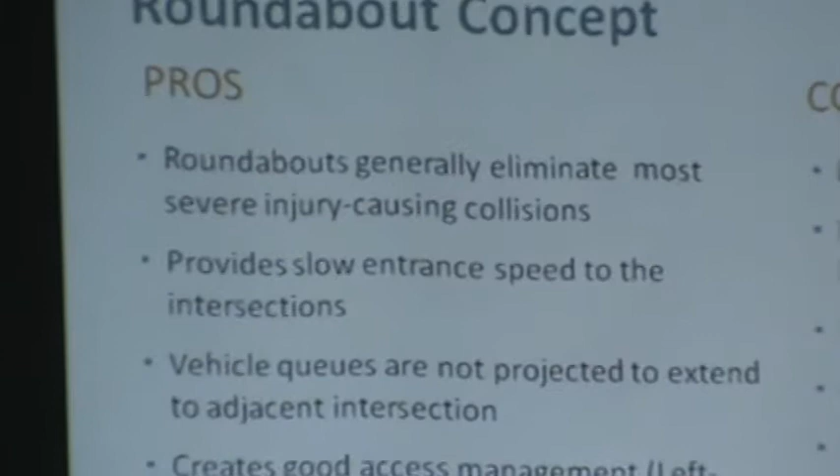The roundabout concept: roundabouts generally eliminate most severe injuries and crashes, because you would end up with rear ends or side swipes rather than T-bones. This provides slower entrance speeds just because of the geometry. The queues are not projected to extend to the adjacent intersections. Creates good access management; you're required to take right turns out of the driveways. Creates lower overall vehicle delays, as shown in the capacity analysis. Less additional turning lanes needed. Reduces pollution from idling vehicles at traffic signals. The safety benefit to cost ratio is greater than 1.

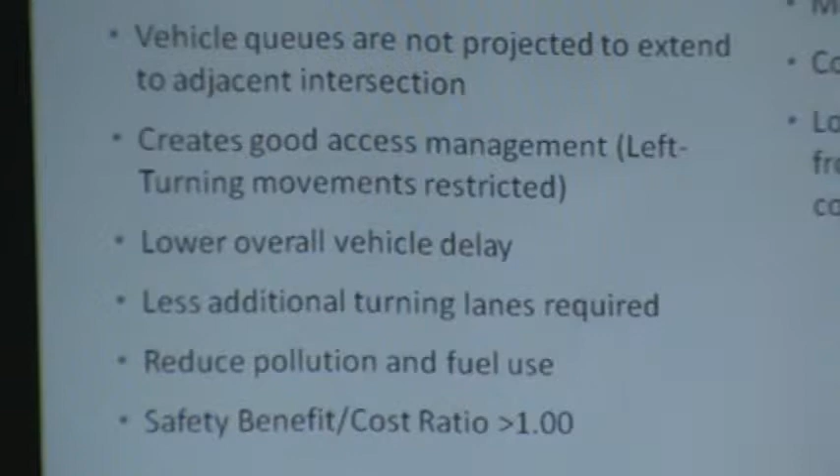The cons: right-of-way, yes, more right-of-way, as shown in that one graphic. The right-of-way taking impacts business. Actually, it's not occupied right now, one of them on the southwest corner of Coddington. More utility poles are impacted. It's a complex construction staging.

However, traffic will be accommodated at other times through the intersection. And one thing I think was mentioned, the DOT has done a lot better job these days of doing nighttime construction, working with business owners to keep those businesses open. If you travel the roadways at night, you'll see that the DOT has implemented a lot of nighttime construction operations.

The longer delays in starting, because, like mentioned, the signalized option is at 75% design, the roundabout option is at 10% design.

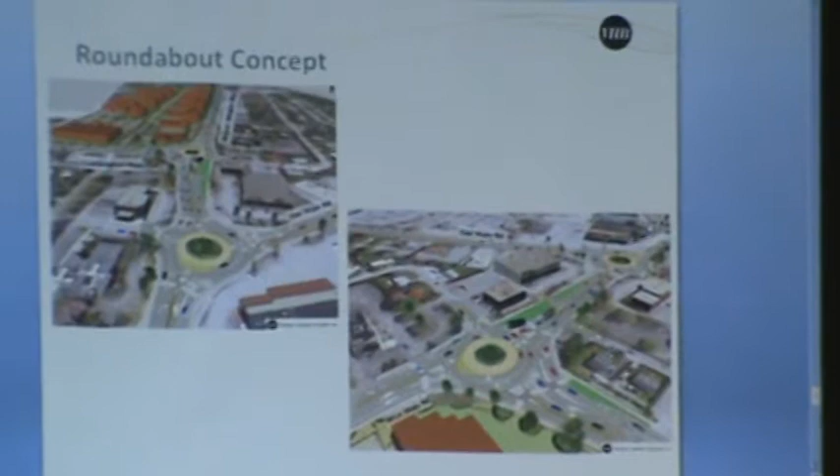We're going to swap the computers out, but then I think we're going to discuss some of the common questions. We got a list of questions, and as we went through several of these presentations, the DOT received emails on some of the concerns. We'd like to touch on a couple of those before we get to public comments, because some of these were repetitive in our emails, and we thought it'd be good to address those up front.

He's going to hook up the computer. It's important that you see the simulations, that's part of the analysis, and it's something that visually helps you understand some of these things. But we can perhaps discuss some of the questions that came up first.

With respect to funding, the options are pretty much a wash when you exclude some of the utility costs and the property acquisition costs. The property acquisition costs are somewhat difficult to estimate at this point, but it will cost more, obviously, for the roundabout option versus the signalized option. We do recognize that, but it's just to give everybody the proper information.

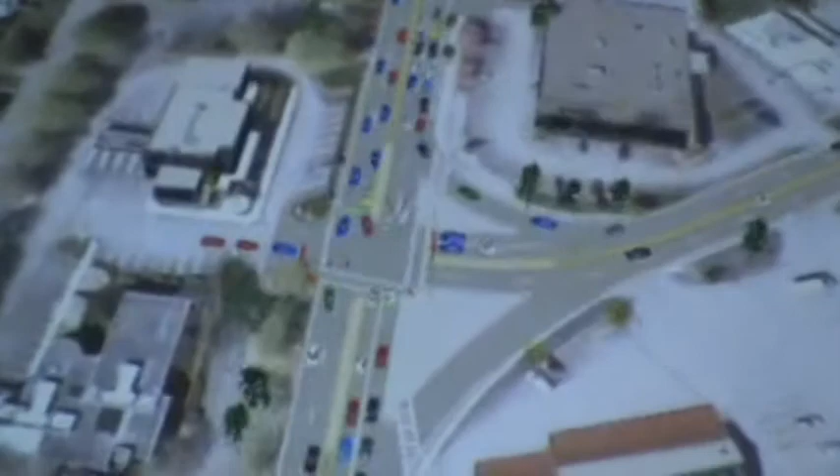This is the existing signal operation. You see a vehicle stopping to take a left turn, blocking the through lane, causing backups on Coddington.

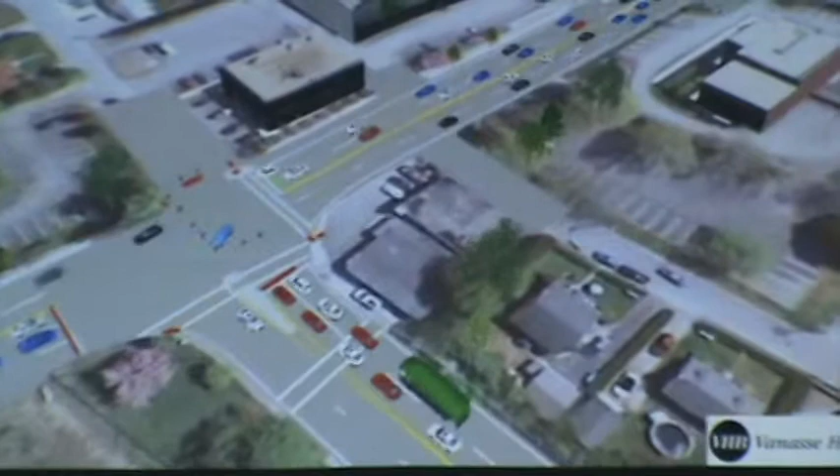Is this current traffic flow or future? This is the existing traffic volumes, during the summer season. What time of day? The PM peak, 4 to 6 time period.

We expanded our study area to go north on West Main.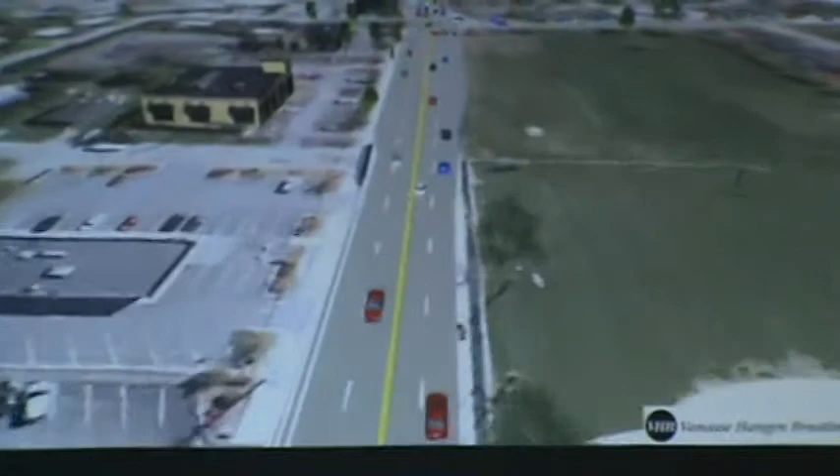We're next going to show the signalized option. It's going to go through the same flyover. Again, this includes the growth center, and includes the left turn lanes.

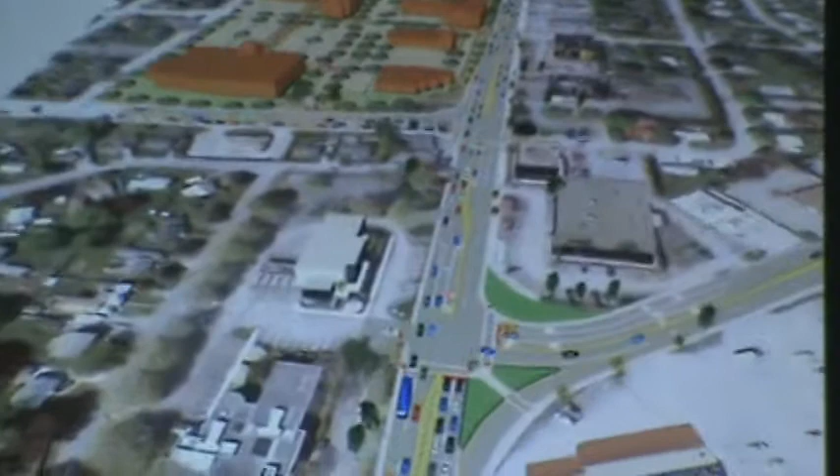This is 2030 volumes, again summer evening peak. See the left turn storage lane just barely accommodated in that spot.

This option would include all new signal equipment at both locations.

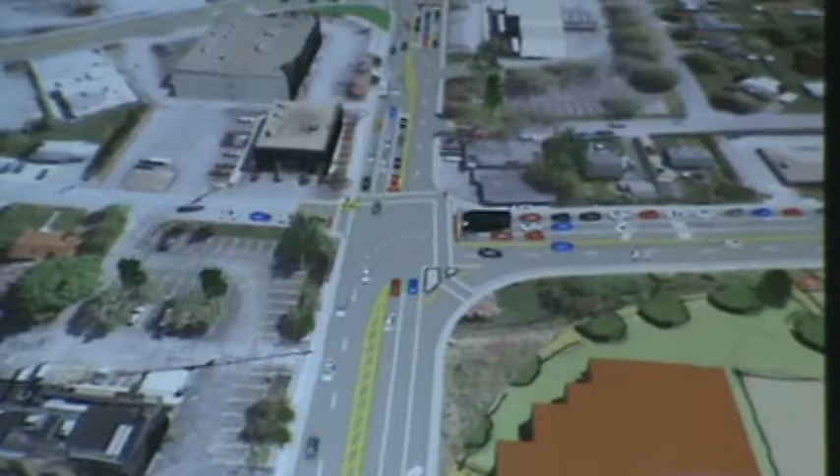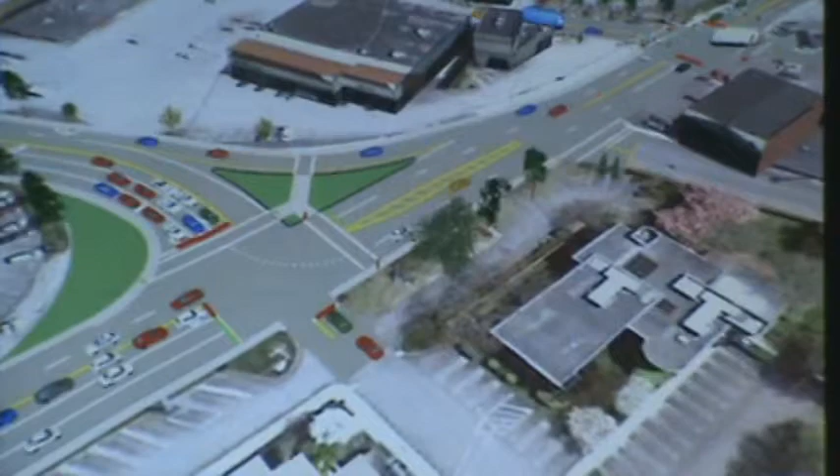One of the other comments we got quite often from the businesses along here: the existing signals create gaps in the traffic which allow people to make left turns out of these driveways. What will happen with that in the future?

The traffic signals to the north will still remain, so you're going to get some gaps from those. The roundabout will disperse the gaps and make them less, it'll be a more random arrival rate from the south. You're not going to get those consistent gaps from the signal. Again, in the peak summer months it's difficult to make a left turn in and out of here today, so imagine 2030 - it's going to be more difficult to make left turns in and out of these driveways with the increased volumes.

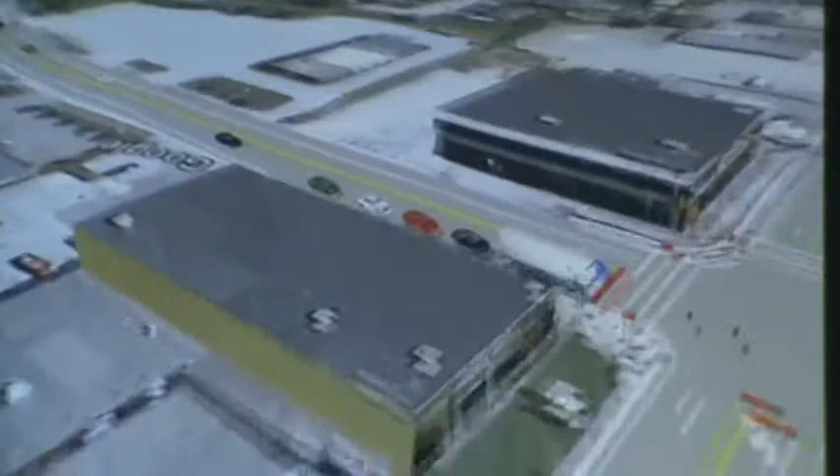At peak season, the traffic to Valley Road backs all the way up to the first intersection. It's not that light - right, definitely more cars in there.

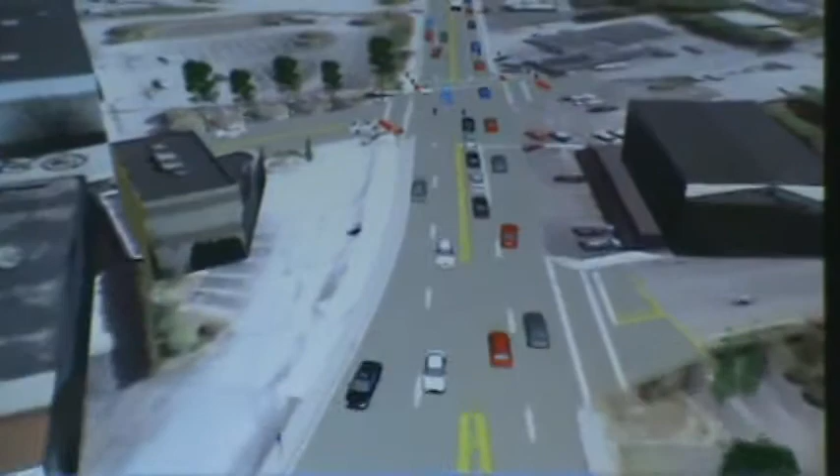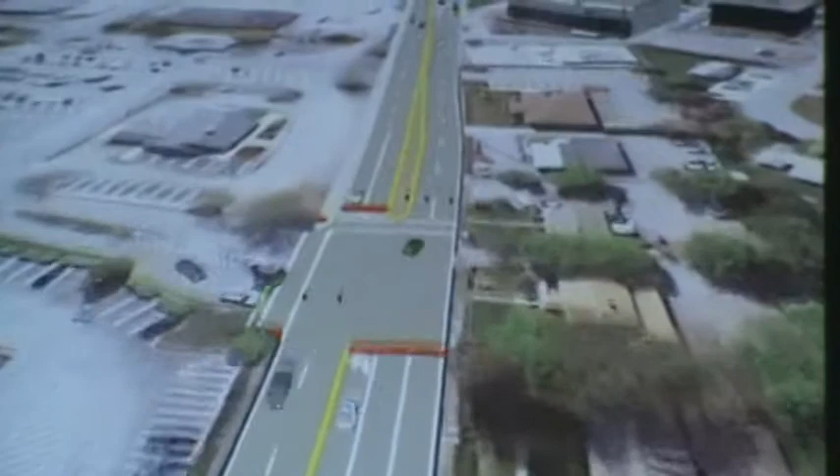Traffic counts - we have traffic volumes for these time periods, and then again we added in growth for the future growth in the area as well as the growth center.

These left turn storage lanes do have an improvement on the operation of these two signals, because they allow two through lanes of traffic to be processed within the signal. This is the roundabout option.

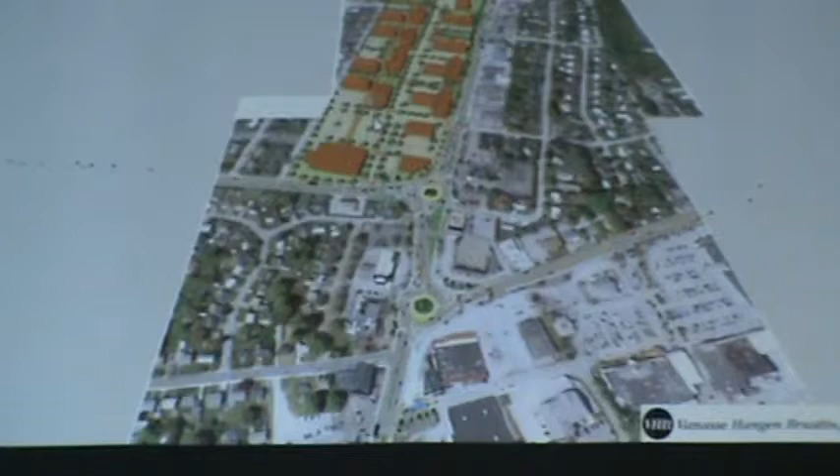This shows that in this left lane, this is the left turn through lane, and this is a through right turn lane.

You show where the pedestrians are crossing. Yeah, these crossings - they cross in advance of the intersection. You look at one direction and cross, then you have a refuge area in the middle, and then you cross the other direction. Kind of watch the figures and watch the street.

The speeds of these vehicles are at 25 miles per hour, because you can't physically drive through this thing any greater than that - these geometric radii of these curves.